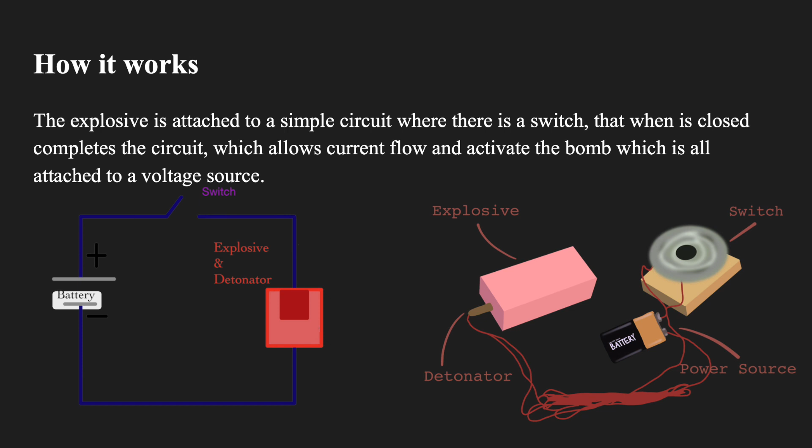How an IED works: the explosive is attached to a simple circuit where there's a switch that, when closed, completes the circuit, which allows the current to flow and activate the bomb, which is all attached to a voltage source.

The circuit for an IED can be built by using a voltage source as simple as a 9-volt battery, a 3.6 ohm detonator, and a wire. Wire has negligible resistance.

Using Kirchhoff's voltage law, which states that voltage equals current times resistance, we are able to derive the equation for the current of the circuit. This lets us see how the circuit is complete and able to detonate the explosives.

For an IED with a 9-volt source and a 3.6 ohm resistor, we are able to solve I equals V over R, where 9 volts is in the numerator and 3.6 ohms is in the denominator. I equals 2.5 amps. This is only valid when the switch is closed. When the switch is open, there is no current.

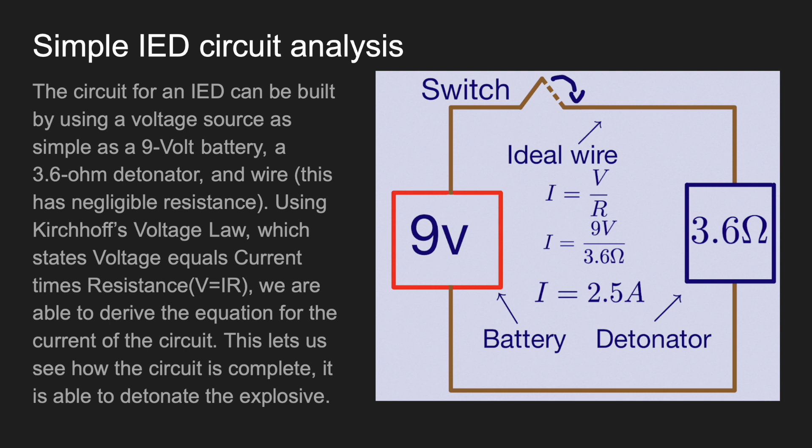More on switches: there are different types of switches, such as triggers, pressure plates, and other switches that could be used for different devices.

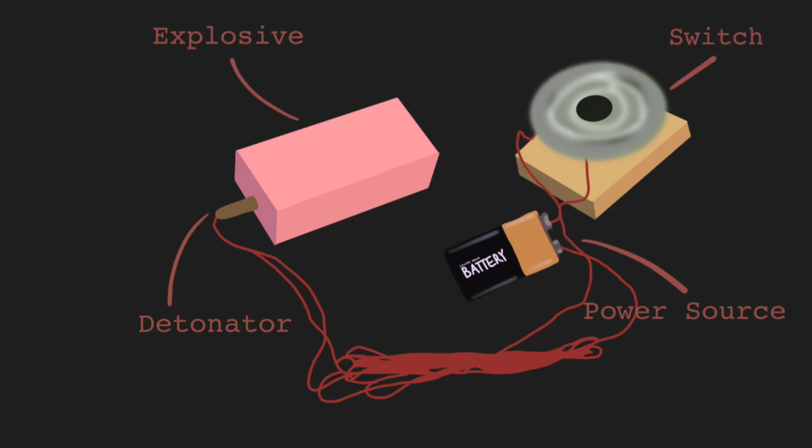I'm Josh, I'm one of the bomb techs here at Tripwire, and we're just going to go over some of the items we have here, some of our inert training aids that we use for classes when students come through.

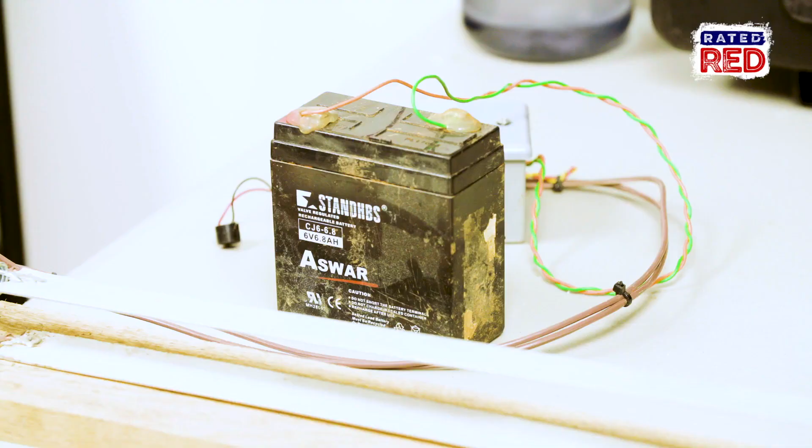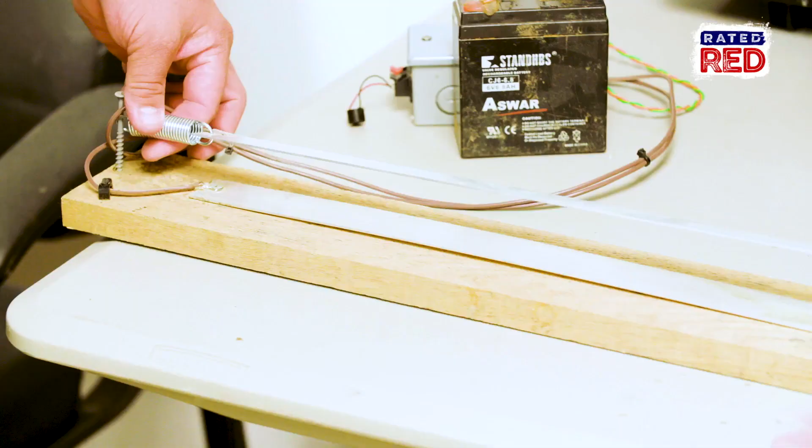First, we have just a real basic type switch used for improvised explosive devices, or IEDs. It's just a wooden and metal pressure plate. It's very popular in Iraq, Afghanistan, and also right now Syria. Power source that it functions with, as you can see, it's spring-loaded, basically functions as a switch. A person or a vehicle would travel over, closing these metal contacts, closing the switch, and then functioning whatever device it's hooked up to.

And here we have a large explosive container. So something like this will be hooked to a switch like we just talked about. This doesn't look like much, it's a 5-gallon bucket with a handle, but a jug like this can hold 25, 30, 40, up to 50 pounds of explosive.

Here we have a basic example of basically a suicide bomber vest that'd be worn around the chest. Devices like this are what was used in the Brussels airport attack, and this could contain a number of explosives or homemade or improvised explosives that can be easily manufactured out of a number of homemade chemicals or readily available materials at any department or home improvement store.

Lastly, we have a pressure cooker type device, similar to the Boston Marathon bombing situation. The pressure cooker is ideal because it pressurizes the material that's inside and allows it to build up, creating a more significant blast. Inside this one particularly, we have fragmentation, just some nails. There could be anything from nuts, bolts, coins, rocks, any sort of debris to cause more harm and discontent on your target.

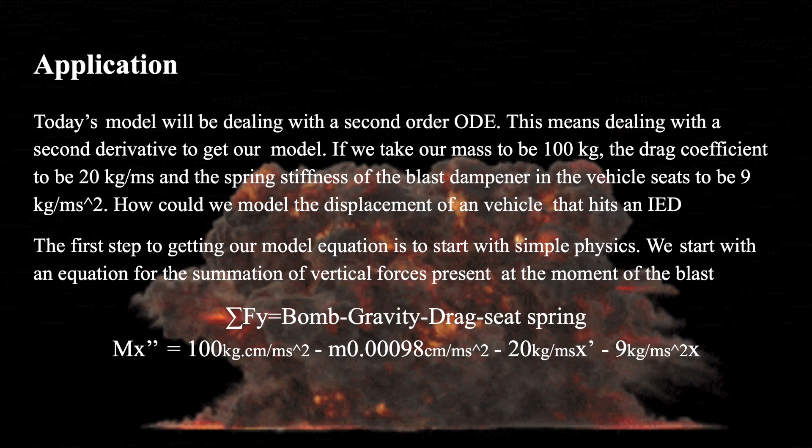The first step to getting our model equation is to start with simple physics. We start with an equation for the summation of vertical forces present at the moment of the blast. We can see in the equation below that the force of the blast pushes the vehicle upward, while gravity, drag, and the spring force from the seats dampen that force.

You'll see that on the left side of the equation, since acceleration is the second derivative of position, it's notated with x double prime. You'll also see that velocity, being multiplied by the drag coefficient, is just x prime.

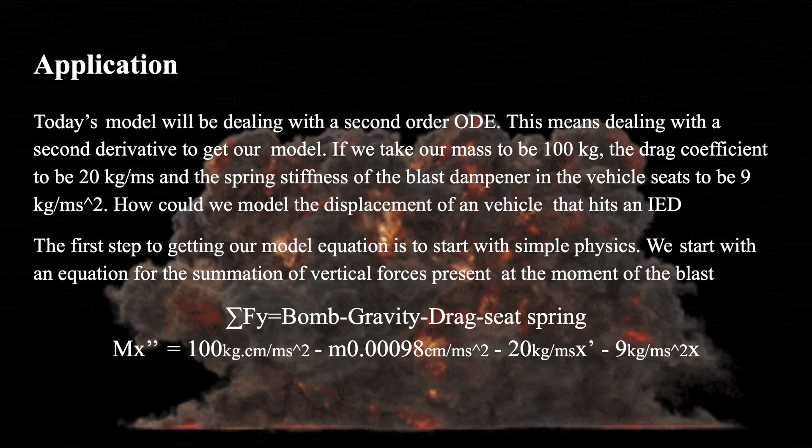You might also notice that the value used for gravity looks a little different. That's because it's been converted to centimeters per millisecond squared. It's very important to keep your units consistent when doing your math.

In this particular scenario, gravity's effect is actually very small, so we can ignore it for now. We can also divide out the 100 kilogram mass from both sides of the equation. After clearing out those terms and rearranging the remaining terms, we'll get x double prime plus 0.2 x prime plus 0.09 x equals 1.

Here we have a second-order non-homogeneous differential equation. The most straightforward way to solve an equation like this is by use of a characteristic equation. In this case, r squared plus 0.2r plus 0.09.

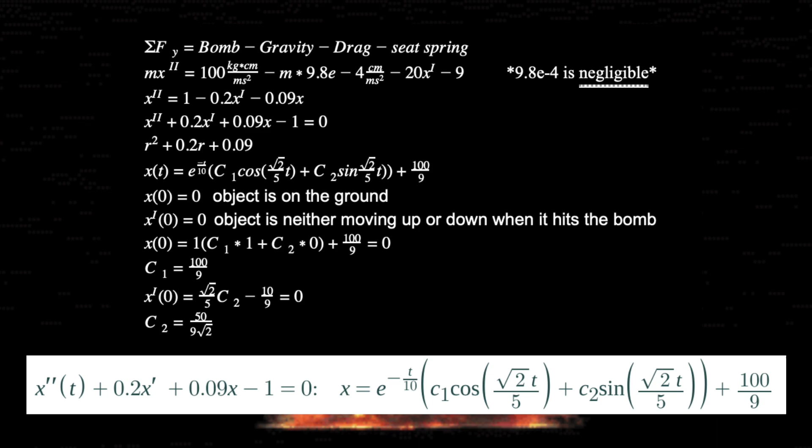Another way we could have solved the IED blast is through a Laplace transformation, primarily when trying to solve the second order ODE by the use of the Laplace transformation. We reach a step after creating a partial fraction where it is a great challenge to find an inverse Laplace transformation, especially based on the material and techniques taught in class.

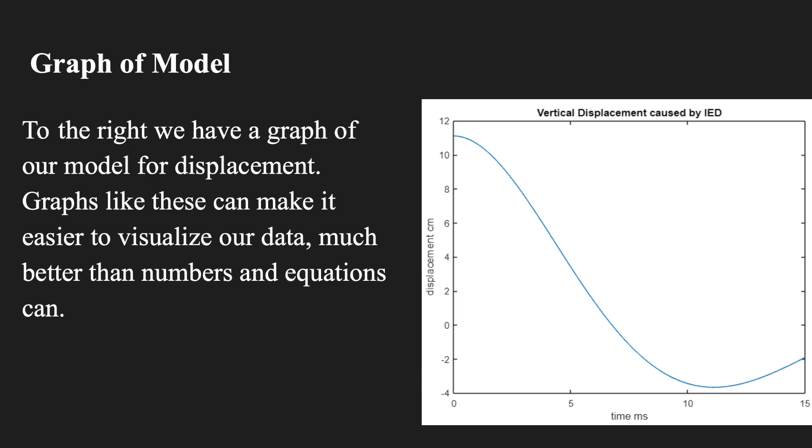Once you have a model equation for the displacement, you can take the derivatives of that equation to get models for the velocity and acceleration as well. The derivatives can admittedly get pretty bulky, so you might want to use a computer calculator. The ones we got are shown below.

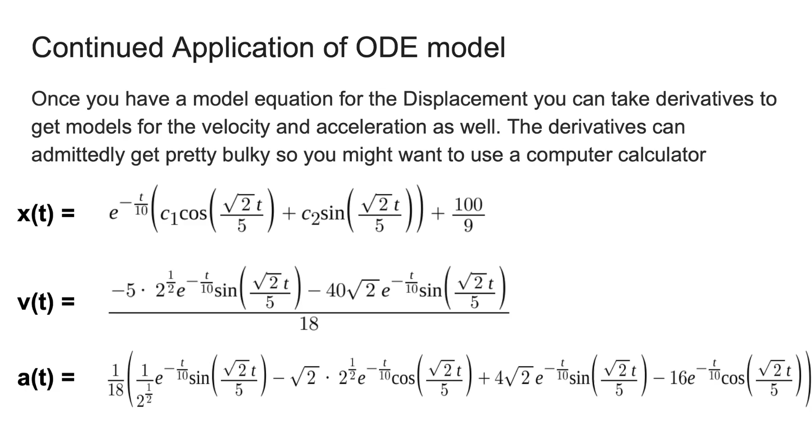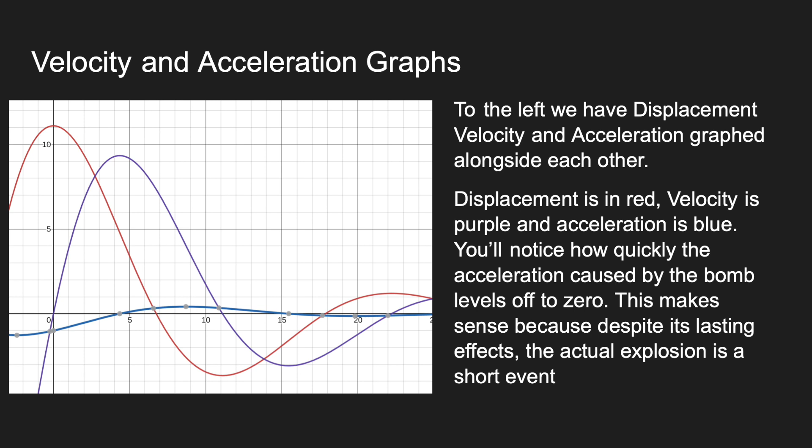Here we have the displacement, velocity, and acceleration functions all graphed alongside each other. Displacement is in red, velocity is purple, and acceleration is blue. You'll notice how quickly the acceleration caused by the bomb levels off to 0. This makes sense because, despite its lasting effects, the explosion is actually a pretty short event.

So a way to combat IED blasts is through blast-resistant seats. An IED blast can have enough force to take down a tank or other military vehicles. Knowing this, the military uses blast-resistant, or attenuated, seats.

These seats are mounted onto spring systems with swinging footrests to assure that the least amount of damage is done to the passenger. Each seat has a harness around the body as well as head restraints to keep the passenger's

body from jerking and moving against the motion of the chair. Here is a brief video to show how these seats work.

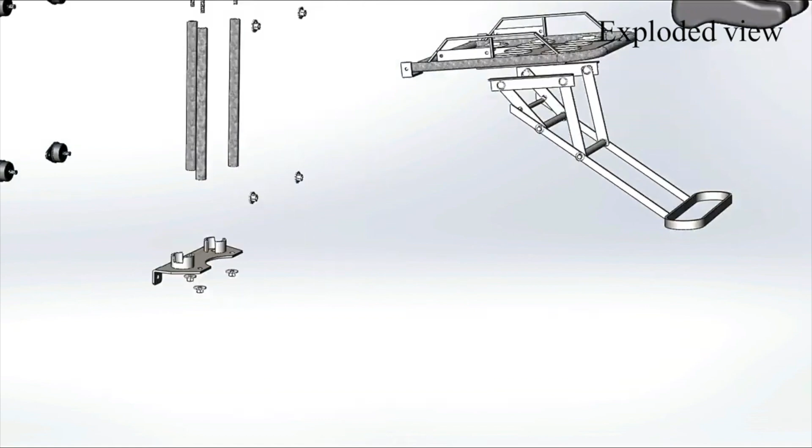The reason this works is because of the spring mechanism built into the chair. When a blast occurs and the acceleration of the vehicle and seats rapidly increases, the blast resistant seat is able to bring the passenger down effectively, lowering the acceleration that would be applied on the passenger.

Oftentimes, there are many effects that can happen due to the blast of an IED. Exposure to these bombs has caused soldiers to develop PTSD symptoms. Those close to the explosion can have objects implanted into their skin.

The blast can cause temporary hearing loss and burns on the skin. The most common injury is called blast lung injury, which can cause death and illness later in life.

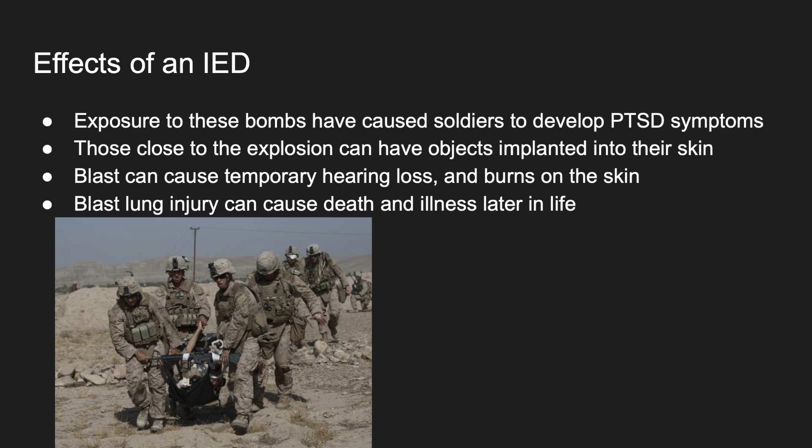Some recent terrorist attacks that IEDs were used in are the Oklahoma City bombing, where that IED is commonly used in mining and blasting, and the 2005 London bombing, where that IED did not really have any common uses, but instead used materials from other different types of IEDs.

The 1993 World Trade Center bombing, where that IED is commonly used in fertilizer, and the Olympic Park bombing, where that IED is normally used as ammunition.

All of these attacks were done using different types of IEDs and also by using a combination of multiple IEDs in one.

So the question is, what should you do if you encounter an IED? If you are near an IED, the first thing you should obviously do is try to get as far as you possibly can from that IED.

However, this is not always possible, so here are some ways to protect yourself depending on where you are. If you're inside a building and objects are already falling, get under a desk or table to seek cover.

If it is clear to leave, exit the building and use the stairs.

If you are outside a building, stay away from any hazardous materials such as windows and glass doors. If you are moving after the IED was set off, cover your mouth and nose so smoke and dirt do not enter your system.